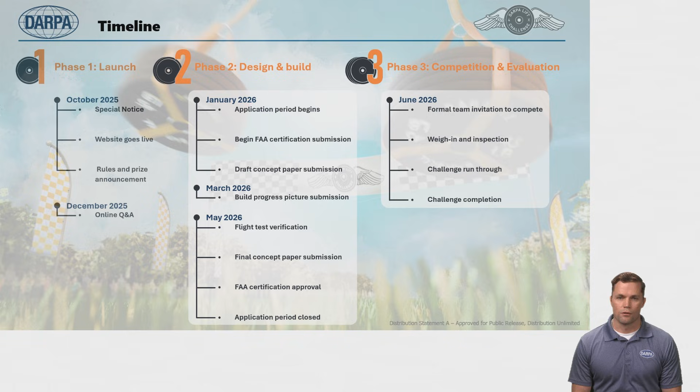Let's clarify again who can participate and how. Collaboration is encouraged between companies or individuals. As I said, you can have both U.S. and foreign team members as long as any foreign members are not on that Department of War restricted country list.

Government and military organizations can participate, but only if the submitted design hasn't been previously funded by the government. And if civilian, federal, or military personnel are using work hours, supplies, or facilities, they must, of course, have their employer's permission.

Each team needs at least one appointed remote pilot in command, or RPIC. That RPIC doesn't need to be a U.S. citizen, but they must have a U.S. FAA pilot certification to operate the aircraft at the competition. Foreign certifications won't be accepted.

Furthermore, DARPA will not provide direct funding or resources to any team. However, we are creating a contributor portal where American companies can sponsor teams or donate materials. That portal will be live later this month, and we'll share that link as soon as it's ready.

We've received a lot of questions about aircraft design, but first I'm going to give you guys some background as to why we selected the aircraft and course parameters for this challenge. It boils down to about 5 key considerations.

First, applicability. The general concept is a simple payload delivery 5 nautical miles away and then returning to base empty. This shows applicability for both the military and civilian sectors.

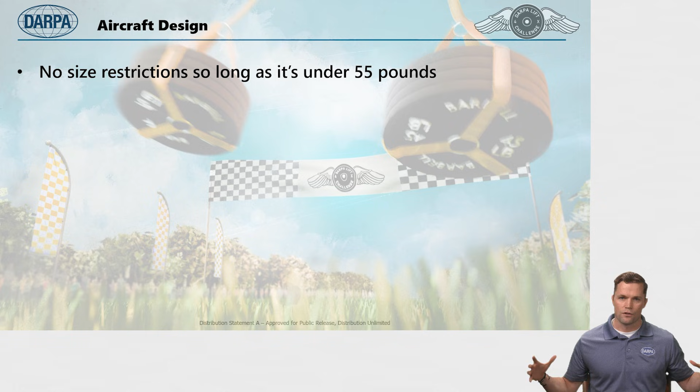Okay, some other things. Modified COTS or commercial off-the-shelf drones are perfectly acceptable. Energy and engine types are unrestricted by DARPA, but you must first adhere to all FAA regulations and safety guidelines. If you run into any issues, email us at our challenge address. Starter motors and systems can be separate, but landing gear or components must be part of the aircraft.

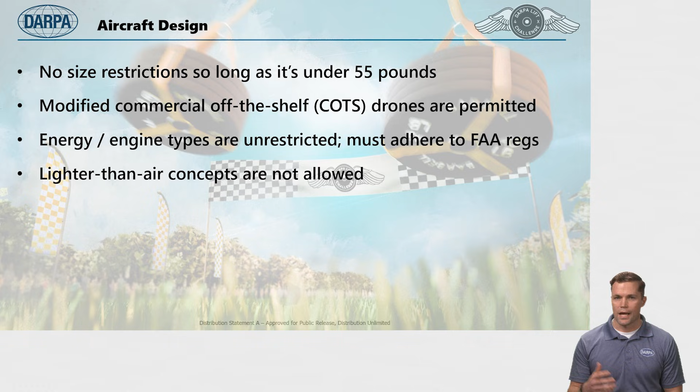All parts of the aircraft, including energy and any payload attachments, must be under 55 pounds total. Lots of people asked that question. Lighter than air concepts are not allowed for reducing aircraft or payload weight. Gases can be used for propulsion and controls, but not for lift.

Regarding takeoff restrictions, the aircraft and payload must take off vertically. No sliding or rolling takeoffs, even inside that 5-foot radius. No minimum vertical height is required before forward flight starts.

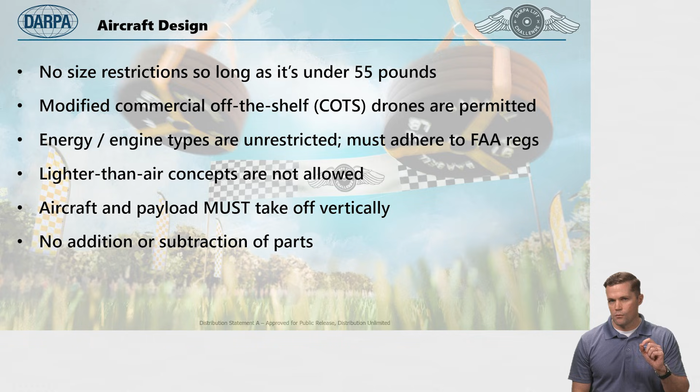We are not allowing the addition or subtraction of parts or components between the loaded and unloaded portions of the course, including adding any energy. Transformation is allowed, but you must carry all components, including payload attachments, during the unloaded portion of the route. The only things left behind are the gym plates. That's a crucial one. Lots of questions there.

NDAA compliance is not required for this challenge, meaning you can buy parts from wherever. There are no specific autonomy requirements, but we do require a human pilot backup if autonomy is used. Specific radio frequencies will not be used during the challenge. Using a control link protocol similar to ExpressLRS is recommended.

Lastly, DARPA will not claim IP. You're free to protect your designs via patents before the event. Keep in mind this will be an open event where photography and videography will be allowed throughout the area.

Okay, moving on, let's talk about the payload. The payload will be made up of barbell standard brand cast iron weight plates. The increments we'll be using are 45, 35, 25, 10, 5, and 2.5 pounds, so any combination of those. The plates must be co-located and can't be part of the structure, and the orientation of the plates doesn't matter.

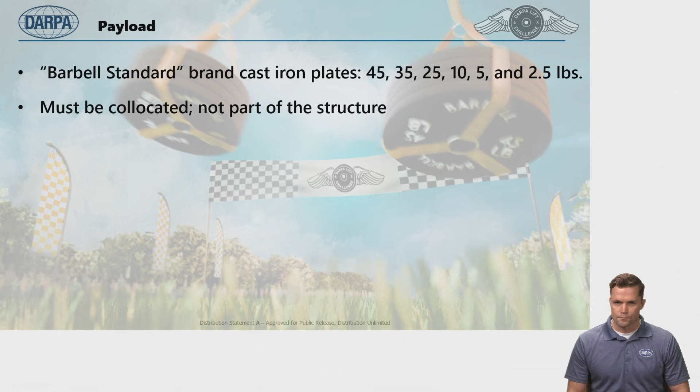The payload can be tethered, but both the aircraft and payload must stay within the 350 plus or minus 50 feet in altitude during the flight.

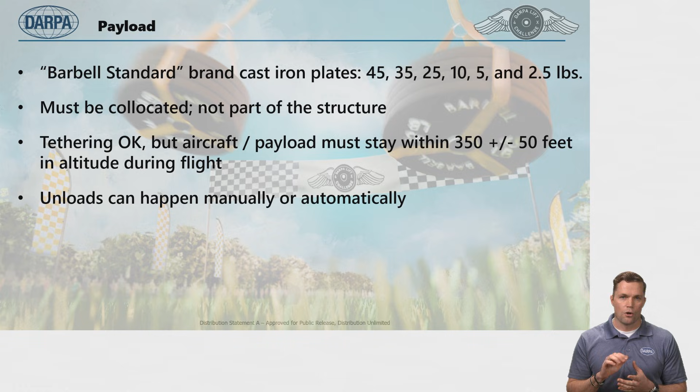Unloads can happen manually or automatically. However, manual unloads can only happen after rendering the aircraft safe. Also, the overall flight time does not stop during the unload and will continue throughout the flight attempt.

We'll use two trackers, one on the payload, which is included in the payload weight, and one on the aircraft, which is the required FAA flight ID, and that will count towards the aircraft weight.

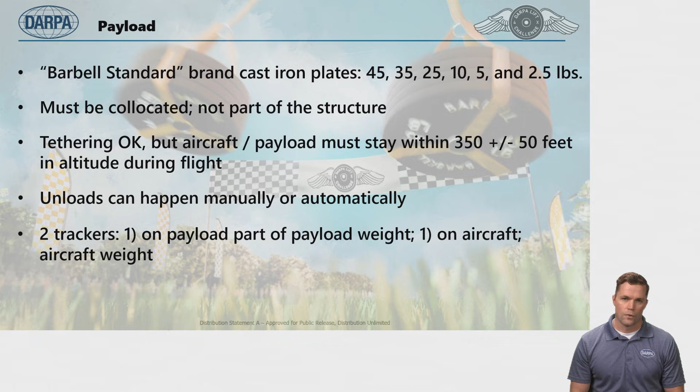Okay, now that we have covered challenge rationale, aircraft design, and payload details, let's talk about the summer 2026 event. As implied in the rules, the competition will be held outdoors, and you will have to fly in whatever weather conditions are present during your flight window, up to the limits defined in the rules.

Each team will have a designated home base area under a large tent equipped with power, tables, and chairs. Facilities and other amenities, including food, will be available on site.

There will be an open event where the public will be invited and your designs will be on display.

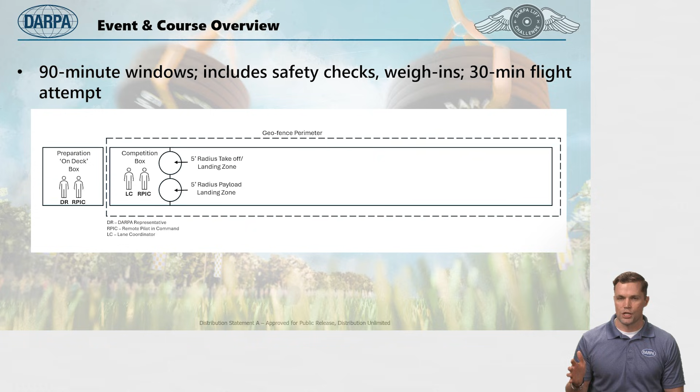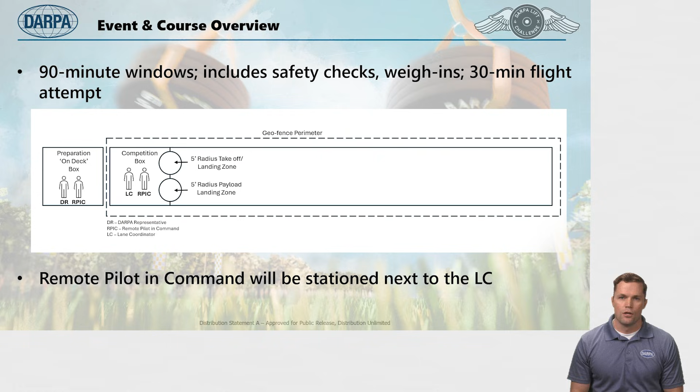At the start of your 90-minute flight window, you'll move to the competition box for safety checks, weigh-ins, and your first flight attempt. The remote pilot in command will be stationed next to the lane coordinator within the competition box at the end of the lane throughout the entire flight window.

Time starts when the payload leaves the ground and ends when the aircraft lands after the final unloaded nautical mile and the power is cut. The payload must touch the ground vertically within the 5-foot radius payload landing zone. The payload must land in a safe and controlled manner. Again, no clock stoppage during the payload drop-off.

Your aircraft must attain a flight altitude of 350 plus or minus 50 feet by 0.5 nautical miles, and you can start your descent at 3.5 nautical miles. Remember, you must complete 4 full nautical miles before dropping off the payload, then complete the final unloaded nautical mile. For that one, you must reach flight altitude by 0.2 nautical miles and can descend after 0.8 nautical miles.

If any of these criteria are not met, it will result in an infraction. Infractions simply invalidate that specific scoring attempt. We will not have a points reduction system. A nearby screen will record your telemetry and digitally inform you if an infraction has occurred.

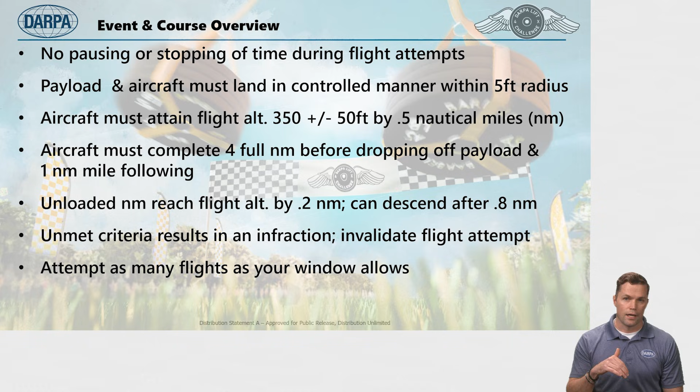If this happens, you can continue to practice or return to the start point, prepare your aircraft, weigh it again, and start again. You may attempt as many flights as your window allows. However, you must land back in the takeoff landing zone by the end of your flight, regardless of where you are in your attempt.

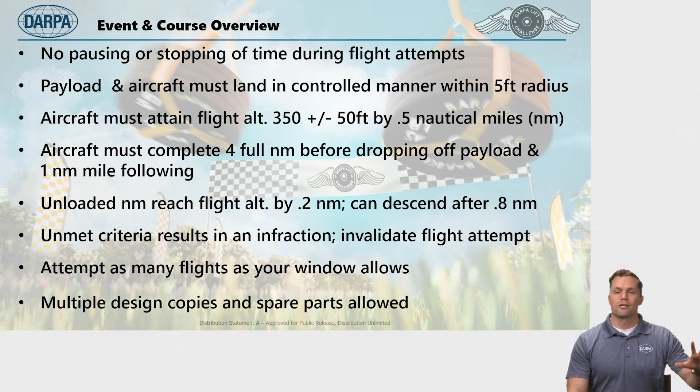We're collaborating with Flite Test, the popular RC aviation organization, to leverage their event and collaborate in building a robust community. Their president, Josh Bixler, is with us today.

There he is. Hey, Josh, welcome. We're excited to finally announce our competition. What do you got to say? The floor is over to you.

We are beyond excited to be able to collaborate with DARPA on this upcoming Lift Challenge. For over 15 years, Flite Test has worked hard to inspire over 2 million community members to dream bigger, build bolder, and to push flight to new limits. We do this through entertaining with our family-friendly YouTube content. We educate through our FT STEM programs, and we also inspire others by doing some really crazy builds and bringing others along the journey. This Lift Challenge is an amazing opportunity to engage with a worldwide community of flight enthusiasts all around a common goal.

As I said, the number of registrants will determine where we host the competition. One possible option would be to potentially co-locate with Flite Test's flagship event, Flite Fest in Malvern, Ohio in June.

We really look forward, Josh, to sharing more about the collaboration in our coming months, and appreciate you hopping on with us. Okay. All right, let's finish up and cover a few remaining items.

First, the FAA requirements. All participants must follow FAA Part 107 guidelines while you are under 55 pounds. This includes the drone pilot license, registration, and Part 107 airworthiness.